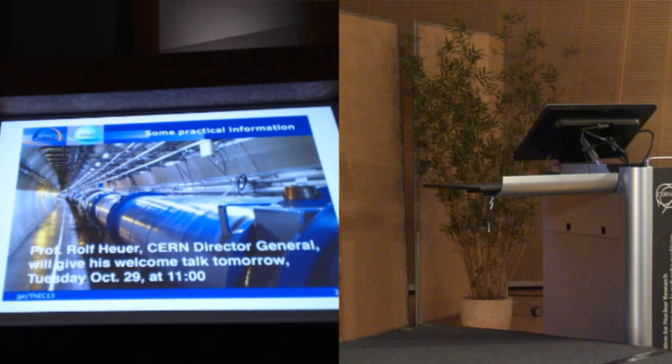The Director General of CERN had to unfortunately modify his agenda, so he will give his welcome talk tomorrow at 11 o'clock. Another announcement is that we have the honor of having the former president of the Swiss Confederation coming to attend the workshop tomorrow, and Pascal Couchepin will also give us a speech at the banquet tomorrow night at Hotel Président. I would like also to tell you there is a slight modification in the agenda compared to what you received in your brochure.

The lunch break was moved earlier by half an hour, so the last talk of the morning was moved to the first talk in the afternoon. Please take note of this. We have more than 200 participants from 32 countries. All continents are represented at ThEC13, and I think this is already in itself a good sign for this conference, and a clear testimony to a strong worldwide interest in thorium.

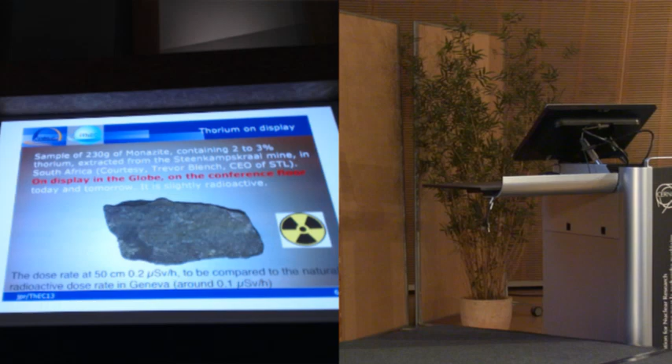Well, since we talk about thorium, I thought that it would be a good idea to have at least one piece of thorium in the room. And you will see it. There is a little display here. There is a little sample of thorium. Actually, it's thorium ore. It's monazite. It's coming from a mine in South Africa. It's 230 grams. There is 2 to 3% thorium in it.

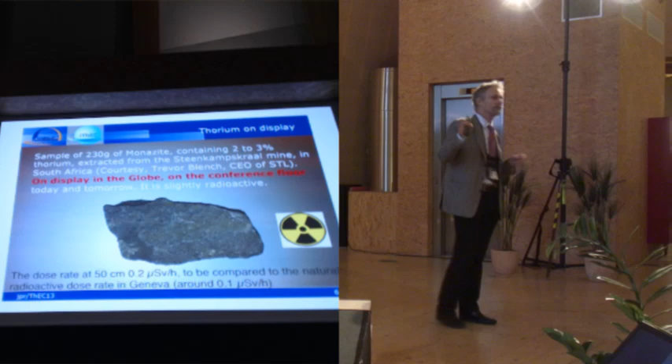And actually, this was the most challenging part in the organization of this conference, to convince all the authorities that you can have a little piece of radioactive things here in the room, even though the radioactive level is really benign. In Geneva, the natural radioactivity level is very low. It's 0.1 microsievert per hour, and this thing, if you sit at 50 centimeters, gives you 0.2 microsieverts per hour. So if one of you wants to spend the whole conference, night and days, 50 centimeters away from the sample, you will only increase your annual dose rate by 5 to 6%. And I'm sure you will not do that anyway.

So, a little practical detail. There will be 2 conference photos taken in order to make sure that we catch all participants. Both of them will take place in the globe, but the first one will take place right of this stand here, and we ask for your cooperation to do that relatively quickly so we don't spend too much time on this. The next photo will be taken tomorrow at 10:45 sharp. So if you want to be on the photo tomorrow with the former president of the Confederation, then be there.

This session has 2 talks. The first one by Claude, the second one Carlo Rubbia. Then we'll have the conference photo. There will be a coffee break. Coffee breaks take place in the tent, which is set outside the globe, and we resume with the next session at 11 o'clock sharp. So let me introduce the first speaker, Claude Haegi. He's a very busy man.

Among other activities, he's the president of the European Foundation for Sustainable Development of the Regions of Europe, the FEDRE. FEDRE is promoting sustainable development and inter-regional cooperation in Eastern, Central and Western Europe and around the southwestern Mediterranean Sea. He's an expert, honorary member and former president of the Congress of Local and Regional Authorities of the Council of Europe. He's a former president of the government of the Republic and Canton of Geneva, a former mayor of Geneva, and is president for Europe of the Foundation Denis de Rougemont.

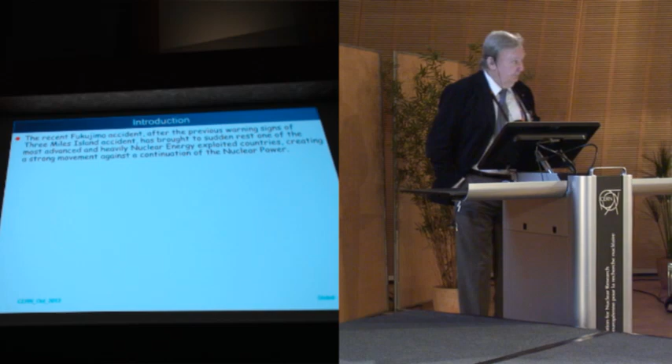Let me go back to the very nice presentation, very deep presentation of Haegi, which has described many of the points which I will try to come to mention. And let me start with this business of nuclear energy, and especially the recent Fukushima accident.

After the previous warning of Three Mile Island, we should not forget that the second event has brought to sudden arrest one of the most advanced and heavily nuclear energy exploiting countries, creating a strong movement against the continuation of nuclear power. This has proven the inadequacy of the present probabilistic concept, vastly used by the nuclear community, and the necessity of an entirely new, alternative, deterministic approach.

In order to be vigorous and continuous, nuclear power must be profoundly modified. New breeding reactions based on tritium, natural uranium or thorium, and which may last for many thousands of years, far beyond fossils, must be pursued, but with much stricter safety and deterministic level. The long-lived waste problem has to be solved. For such new processes, a distinction between renewable and non-renewable energy is purely academic.

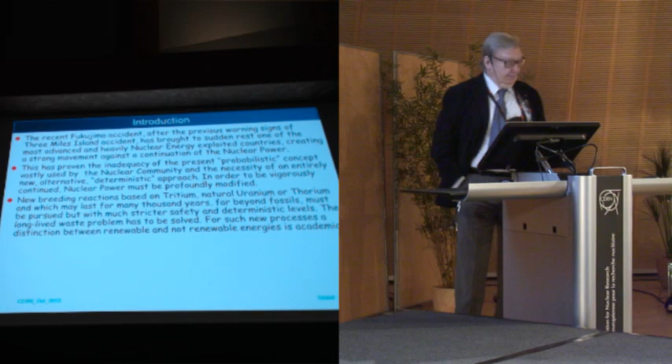Amongst the various breeding alternatives, the use of thorium represents a unique opportunity. This is a very old idea, strongly supported by the main fathers of nuclear energy, like Alvin Weinberg, Eugene Wigner, and Ed Teller, but perhaps then also ultimately neglected because of the intrinsic absence of military fallouts. The use of thorium deserves nowadays a considerable attention.

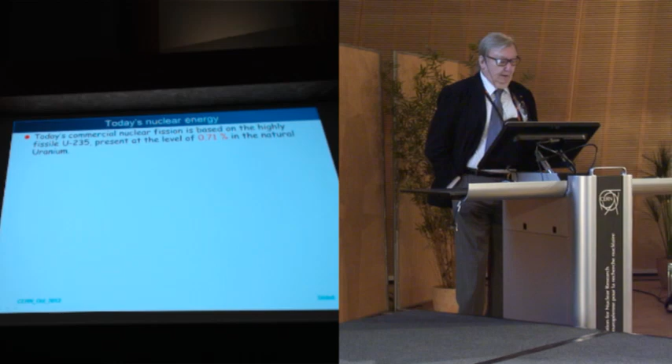Now, today's nuclear energy is based on the highly fissile uranium-235, which is well known to be present at 0.711% of the natural uranium. Ordinary nuclear reactors may operate either directly from natural uranium, CANDU type reactors, or more often with the help of uranium-235 enrichment, leaving behind depleted uranium tails, typically at 0.25%. In both alternatives, a substantial fraction of uranium-235 remains unused, and in practice less than 1 part in a few hundred of the natural uranium is actually burned.

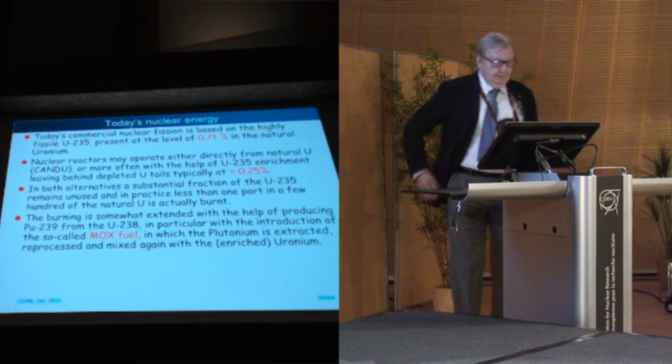The burning is somewhat extended with the help of producing plutonium-239 from the uranium-238, in particular with the introduction of the so-called MOX, in which the plutonium is extracted, reprocessed, and mixed again with the enriched uranium. These procedures reduce significantly, typically more than 30%, the consumption of uranium, but increase several times the amount of the minor actinides in the spent fuel, and the residual long-lived radiotoxicity of the waste.

Now, although the exact amount of exploitable ores is not exactly determined, and depends on the lowest level of the recoverable uranium, as long as uranium is used in this way, at the present level of consumption, which is 6.5% of primary energy, there are probably no more reserves of uranium than of oil and gas.

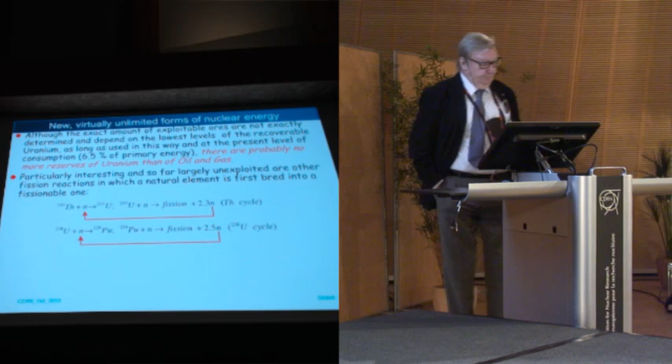Particularly interesting and so far largely unexploited are other fission reactions, in which a natural element is first bred into a fissionable one. And there are two of them that you well know. The first one is the thorium cycle, in which thorium becomes uranium-233, and then it fissions; it closes the loop. And the second possibility is uranium-238, in which it goes to plutonium-239, and then plutonium is fissioned back again with neutrons emitted.

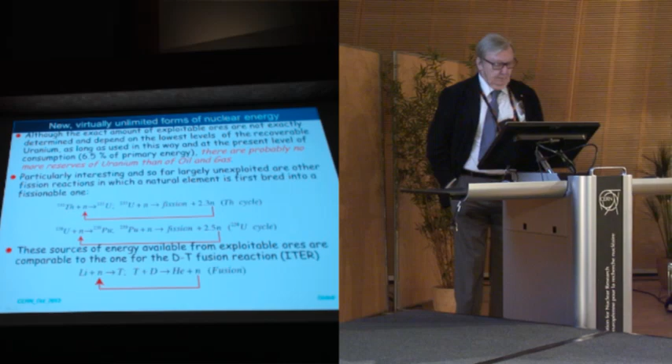These sources of energy available from exploitable ore are very large, comparable to the one of the fusion reactor, deuterium-tritium ITER, which is indicated here. Another breeding reaction: lithium plus neutron going to tritium, and then tritium becomes a source of fusion, tritium plus deuterium giving helium plus neutron.

The real question is, of course, how much thorium is available. Thorium-232, a pure isotope, an unexploited energy resource, is about 4 times more abundant than uranium in the Earth's crust. While most of uranium, however, is dissolved in the seas, thorium is present as mineral deposits. The total abundance is estimated to be 1.2 × 10^14 tons. Soil commonly contains an average of about 6 parts per million of thorium.

The monazite black sand deposits, which Jean-Pierre Haegi just described a minute ago, are composed of from 2 to 22% of thorium. Thorium can be extracted from granite rocks and phosphate rock deposits, rare earths, and tin ores, coal, and uranium mine tailings. Estimates of the available thorium resources vary widely. The 2007 NEA publication, Uranium: Resources, Production and Demand, gives only 4.4 × 10^6 tons of known and estimated thorium resources, but this still excludes data from much of the world.

For instance, with well-designed thorium burners, the whole 2007 electricity production of China, which is 3.2 trillion kilowatt hours, could be produced with simply 443 tons a year of thorium, via uranium-233, a few percent of the domestic Chinese rare earth production.

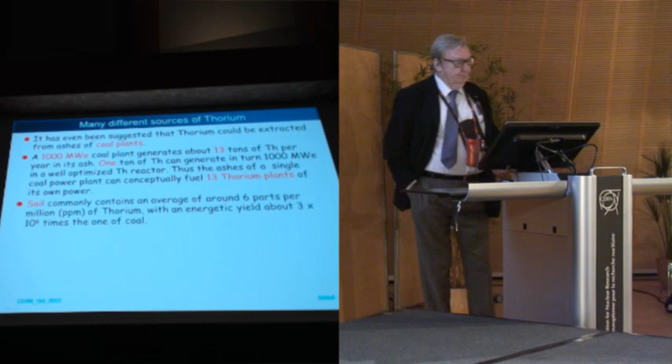Soil commonly contains an average of 6 parts per million of thorium, with an energetic amount of about 3 million times the one of coal. So, if burned in a reactor, the thorium in soil will generate 6 × 10⁻⁶ times 3 times 6, 18 times the energy of the same amount of coal, as I indicated before.

Therefore, recovering 1 in 1,000 of all the thorium in the crust, which, as I said, is 1.2 × 10¹⁴ tons, is equivalent to producing the total primary world power, which today is 15 terawatts, with simply 6 kilotons per year of thorium during about 20,000 years.

I think in order to show very clearly the difference between oil, natural gas, coal, and uranium, you can look at this diagram here, which gives the global energy resources in zettajoules for oil, conventional and unconventional, total oil. You can see the indicator there. Yearly consumption is indicated there. Resources are indicated there. And then consumption until now, already used up, are these things.

You can see clearly that there is more oil now sitting underground than has already been used. So in fact, it means that there's plenty of oil for many, many years to come. Natural gas likewise. Coal is there. Now the important question is the total fossils, indicated down here. You can see this 281 zettajoules available. But this has to be compared with uranium.

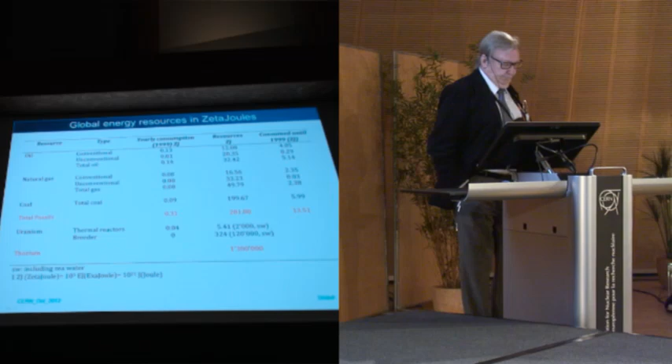with 120,000 of sea water. But this has all to be compared with the situation of thorium, which is all there in the rock, and it represents something like 1.3 million zettajoules. So you can see from those numbers the absolute preeminence of thorium as a source of energy for the future of mankind.

Okay, conclusions. There's only one conclusion. The reservoir represents an attractive potential energy supply for many millennia to come with little or no CO2 emissions. For instance, as I said at the beginning, the total electricity of China could be produced for 20,000 years with thorium reactors and the million tons of thorium available.

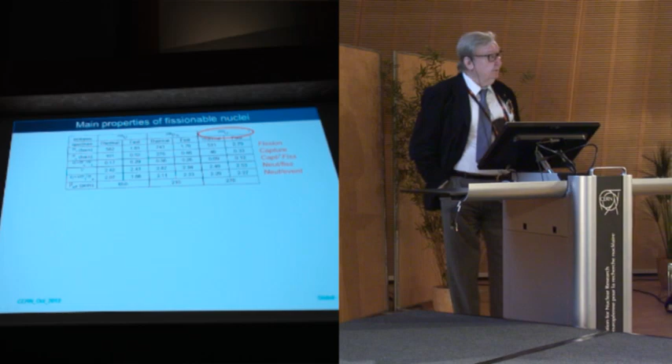Now let me compare the various fissionable nuclei and get a very simple comparison between uranium-235, plutonium-239, and uranium-233. You can see in this table, first of all, the fission, then the capture value, third the ratio of capture to fission, and finally the most important number is nu, the number of neutrons per fission, and then you can calculate also the number of neutrons per event, including not only fission but also capture.

And you can see the preeminence in this equation of uranium-233 over the other elements, and the other important factors which favor uranium-233 over the other systems. Uranium-233 is rather insensitive to neutron energy, alpha and eta. Uranium-233 is the best fissile isotope in the thermal range. You can see here 9% or 12% for the ratio of capture to fission, and this is a very important number.

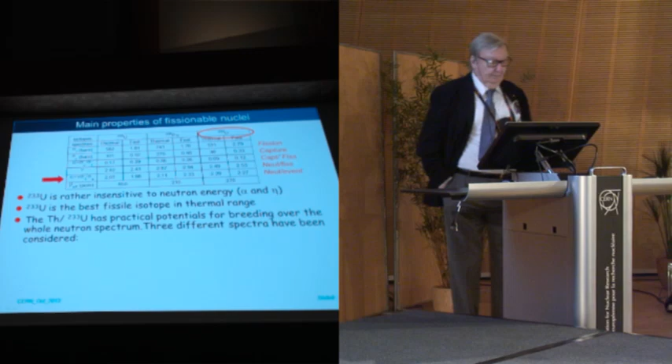Thorium-uranium-233 has practical potential for breeding over the whole neutron spectrum. As you can see in the last column, you can have thermal and fast. Three different spectra have been considered, and will be discussed in my presentation. Thermal or epithermal neutrons between 0.1

and 1 electron volts. Over the resonance region, in which neutron energy goes between 10³ and 10⁴ electron volts, and then fast, which goes from 10⁵ to 10⁶ electron volts. Instead, as you will see in a minute, the uranium-238 plutonium breeder is operable only with fast neutrons.

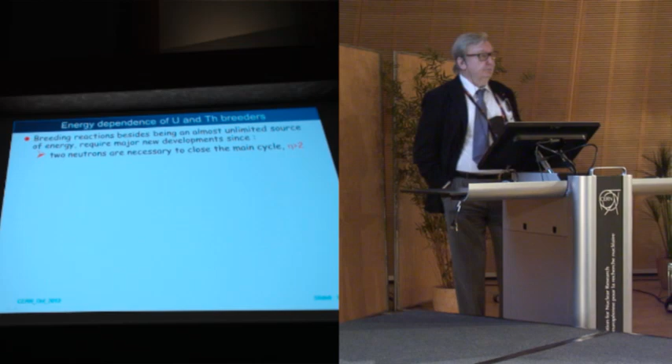And then let's be more specific. This breeding reaction, besides being an almost unlimited source of energy, requires, however, a major new development. Since two neutrons are necessary to close the cycle, one to make the material to be bred, and the second one to transform the bred material into neutrons, eta therefore has to be larger than 2.

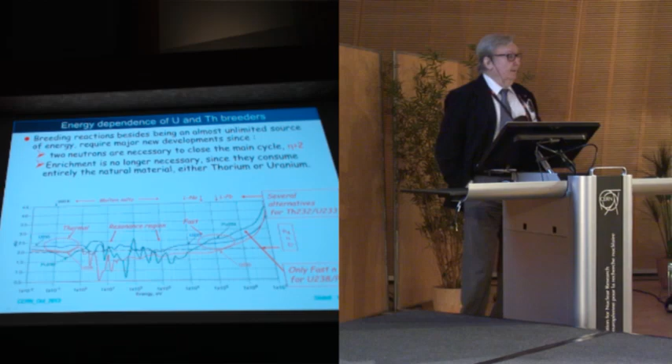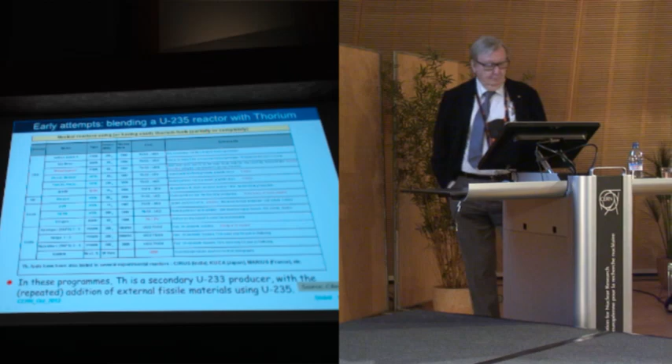Now, let me go a little bit into the historical development of thorium. The early attempts go back to the golden days of the 60s, in which the idea was to blend a uranium-235 reactor system with some thorium. You can see a large number of possibilities described here, small and large, and there has been quite a development from this point of view. In these programs, thorium is a secondary uranium-233 producer with repeated addition of external fissile uranium-235. So it's a mixed thorium-uranium system. When uranium is over, thorium will no longer be usable.

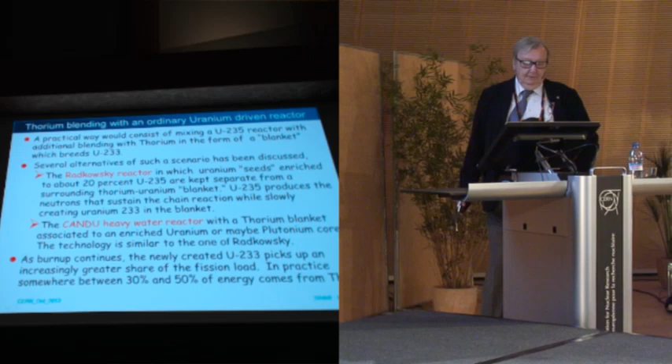The second possibility is the attempt with CANDU heavy water reactors with a thorium blanket associated with an enriched uranium and maybe plutonium core. This technology is similar to the one that Radkowsky had developed. As burnup continues, newly created uranium-233 takes up an increasingly greater share of the fission load. In practice, between 30% and 50% of the energy comes from thorium, and the rest comes from uranium itself.

Now, of course, the real hope is to make a pure thorium breeder, a breeder in which only thorium participates from A to Z. This is essentially the known idea. There are two important people who contributed to this. One is Alvin Weinberg, and the second is Edward Teller. Now, basically, the thermal breeder is represented in this picture here, a simplified diagram from a Fuji reactor.

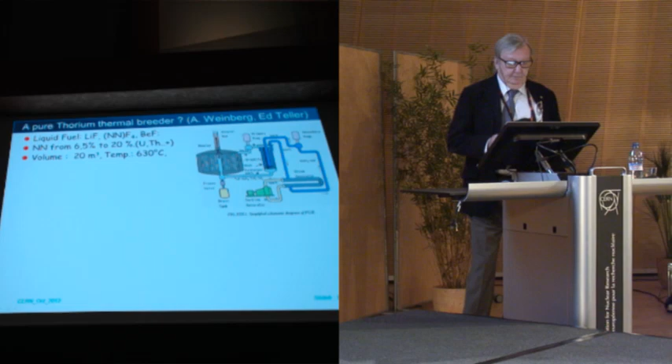It is a combination of a liquid fuel, which is made out of lithium, beryllium, and a fluoride of heavy metal, where N is either thorium or uranium, and which contains somewhere between 6.5% to 20% of thorium or uranium. The volume of this reactor is substantial: 20 cubic meters. The temperature of this Flibe is 630 degrees Celsius. The power of this identified reactor is 1 gigawatt electric.

And the problem with this is that the molten salt reactor fuel is continually reprocessed by an adjacent chemical plant online. This is absolutely necessary to make the thing work. The salt has to be reprocessed every 10 days to ensure criticality. Now, there's a very complicated process here which I'll very quickly describe. The fluorine removes uranium-233 from the salt. A molten bismuth column separates protactinium from salt before decay. And fluorine distills the salts, and the thorium salts must be separated from the fission fragments, which are the waste.

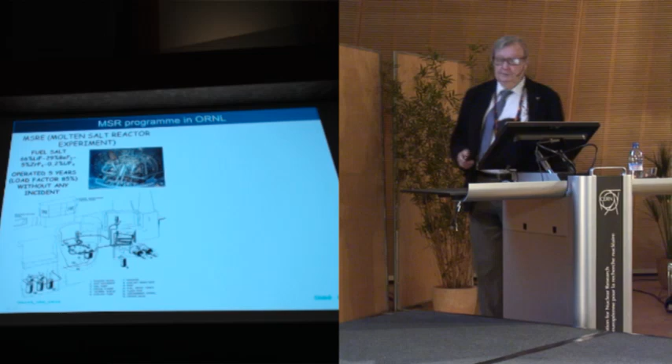Now let me show you this story. Of course, this story was discussed many years ago in the MSRE, the molten salt reactor experiment. It's a well-known milestone of a pure thorium reactor. This thing was developed in the early 60s, and it was operated for 5 years without incident. Everybody knows, I suppose, about that. There is a combination, as you can see, of a nuclear reactor and a chemical plant.

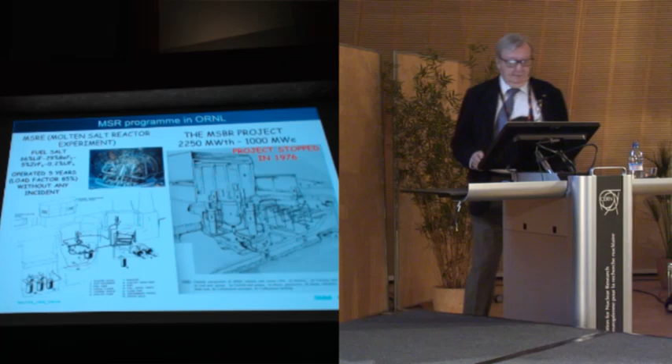Now, there was also a project called the MSBR project, which was presented to make a real big scale reactor, 2 gigawatts with 1,000 megawatt electric. Such a design, you can see here, was being put together, but was stopped, as I said, in 1976 in exchange, of course, for the other alternatives.

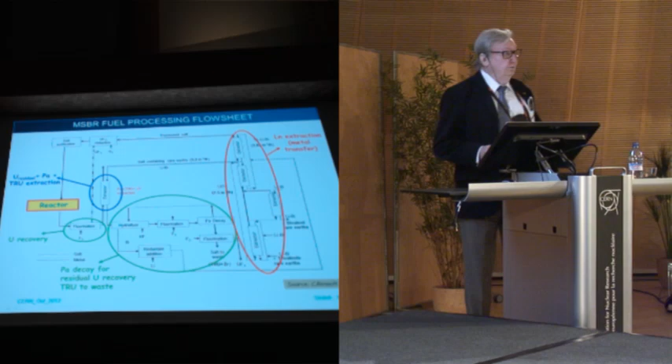The second story is coming from Teller. The thorium fuel reactor is described here and is using molten salt technology. There are lots of features in this reactor which are worth mentioning. The first feature is that it is underground. You see, this is rock, so the system is down there. This is the unit, and the heat is produced here and comes up to the surface. This is a molten salt device in which, in fact, the fuel, the uranium and thorium, are mixed together. Here, for some reason, there is no use of a cooling station.

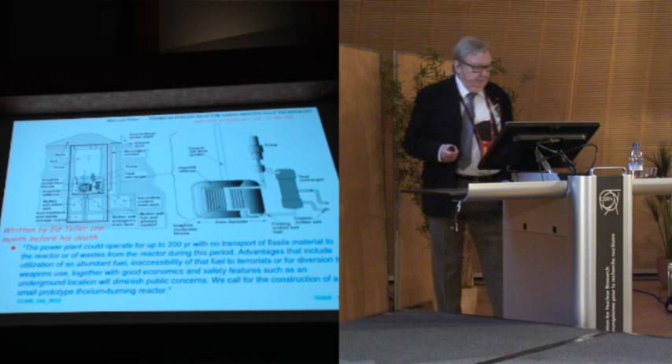This paper was written by Teller 1 month before his death, in 2005, and he wrote something which is worth mentioning: the power plant could operate for up to 200 years with no transport of fissile material to the reactor or waste from the reactor during this period. Advantages that include utilization of an abundant fuel, inaccessibility of that fuel to terrorists or for diversion to weapon use, together with good economics and safety features such as an underground location, will diminish public concern. We call for the construction of a small prototype of a thorium burning reactor. This was done in 2005.

Let me remind you that our work was already done well before, because we had done the work of the CERN activity in the late 90s. But Teller continued to repeat and sustain these kinds of ideas. I think this is important. This was done, as I said, only 1 month before he died. Not only is the assumption really true, but actually the idea is tantalizing.

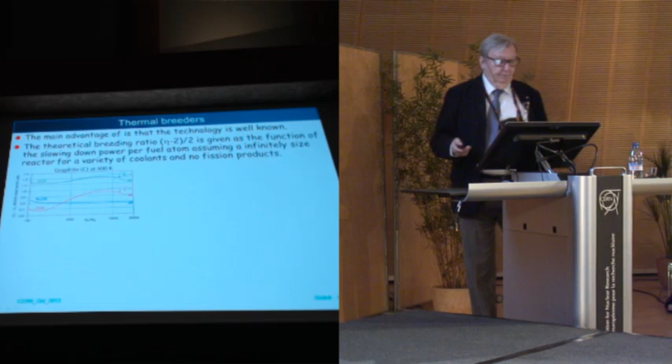So let me come back to the conclusion about thermal breeders. The main advantage of the thermal breeder is that the technology is well known. You can see here, for instance, the behavior for graphite of uranium-233, which is larger than 2. And this is the only thing possible, because the other processes, plutonium and uranium-235, do not reach the breeding equilibrium. The theoretical breeding ratio is given here for an ideal infinite-sized reactor, a variety of coolants and no fission products. You can see more detail of what happens if you do the plot for water, heavy water and carbon.

You can see here that with the appropriate ratio between the coolant and the fuel, you can get something like a breeding ratio of the order of 1.2 in the optimal condition for any of the three solutions. So it's possible to construct either a D2O, H2O, or carbon system in this region with a number there.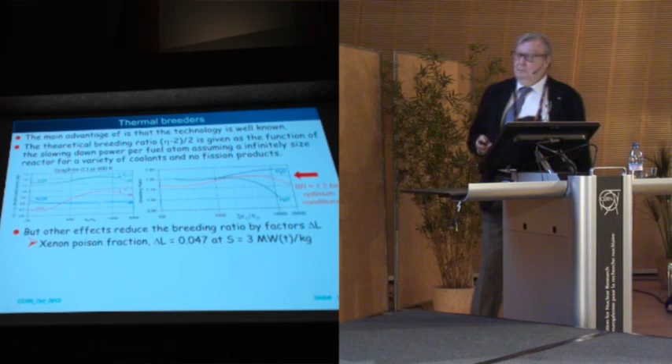However, many other effects reduce the breeding ratio, and delta L is a relative change of the breeding ratio. For instance, we have to add the xenon poison fraction in thermal reactors, which for a relatively low density, like used by Weinberg, of 3 megawatts per kilogram, gives a reduction in L of 4.7%.

Then you have losses to the intermediate Pa-233 capture, where protactinium suppresses uranium-233 because it kills it, giving another change of about 0.1 in L. The third effect is fission product buildup, and also the fact that when you continue to run the system, besides uranium-233 you produce uranium-234, which is relatively less fissile. So the theoretical breeding ratio of 1.2 essentially disappears because of these factors: xenon poisoning and, most importantly, protactinium-233 captures, and so forth.

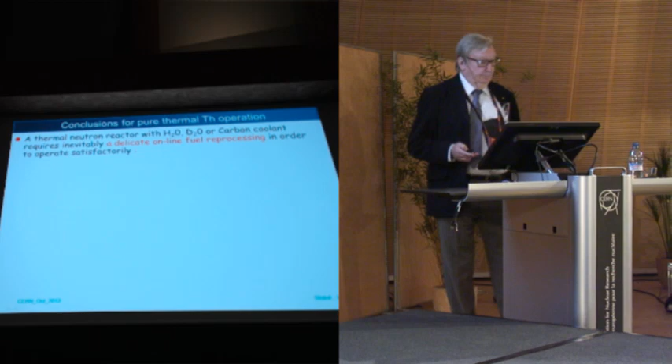And therefore, this is why you necessarily need reprocessing. In fact, the conclusion for a pure thermal thorium operation is that thermal reactors with hydrogen, deuterium, or carbon coolant inevitably require delicate online fuel reprocessing in order to run satisfactorily.

There are two possibilities for this. In a critical reactor, without such chemistry, the small k excess greater than 1 will be quickly wiped out by the presence of fission products, fuel cladding, and so on, as I said. In comparison, an ordinary CANDU, which has the lowest k-infinite possible, has k0 of 1.47, while here we have something like 1.1 to 1.2 for the case of thorium, so it's too small.

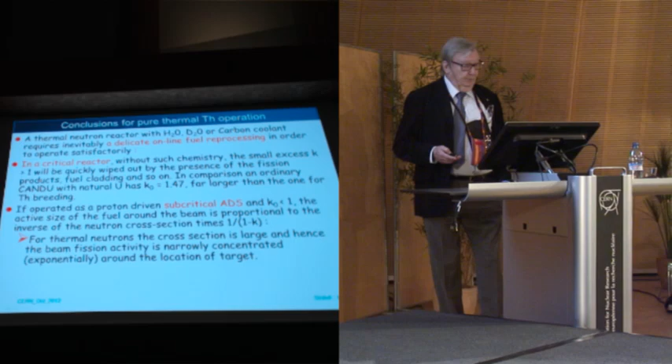Now, you can say, why not make a subcritical ADS, thermal subcritical ADS, with a proton-driven system, K less than 1? But then you get another problem, because the active size of the fuel around the beam is proportional to the inverse neutron cross-section times 1 over 1 minus K. For thermal neutrons the cross-section is large, so the fission activity is narrowly concentrated, exponentially, around the target. Therefore the beam-activated volume for fission energy production, even in a thermal ADS with a reasonable K0, is strongly localized and not very uniform.

So it's not easy to make even a subcritical system as a thermal unit, just because the concentration is very close to the proton beam, and it does not allow you to construct a uniform filling of a critical mass. Now, the conclusions.

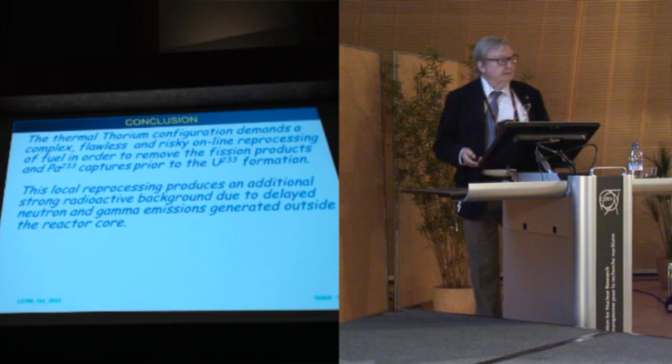The local reprocessing produces an additional strong radioactive background from delayed neutron and gamma emissions generated outside the reactor core. That's another phenomenon: the system which extracts material for reprocessing is also carrying some neutrons with it, because of delayed neutrons and gamma emissions. Therefore, not only will the reactor be very radioactive, but all your chemical plant will be super radioactive. You have to solve that problem.

It's unlikely such a technology may become widely acceptable, especially in view of the presently very sensitive critical public concerns. So thermal thorium reactors have a lot of problems, which seem quite serious.

This is why another point of view was created, in fact CERN-related, already in 1995, which is called the thorium-driven fast energy amplifier. Let me briefly describe this situation.

The drawing is there, many of you already know it. It's a subcritical system powered by a proton accelerator, using fast neutrons in a fuel cycle based on natural thorium. This is a closed cycle, with recycling indefinitely happening; the waste are fission fragments and structural material, which are relatively short-lived. Lead is used as a target, both as a neutron moderator and as a heat carrier.

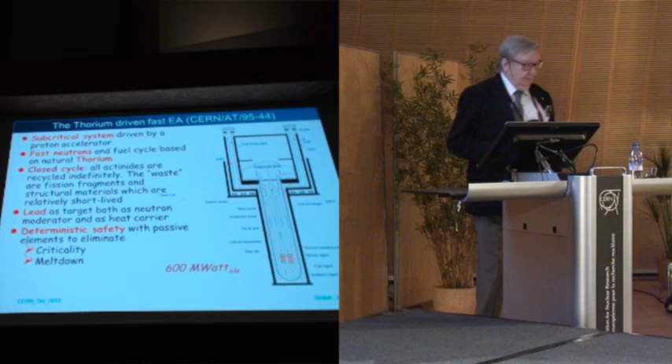This is a subcritical system with deterministic safety and passive elements to eliminate criticality. There is no meltdown possibility, with decay heat and seismic protection built in. This is essentially the key to this process.

The fuel discharge produces some spent fuel. The spent fuel is reprocessed and refabricated, adding the fresh thorium supply, and it is coming back into the cycle, except that the fission fragments are packaged as waste and put in the central deposit. That's the basic idea behind all this.

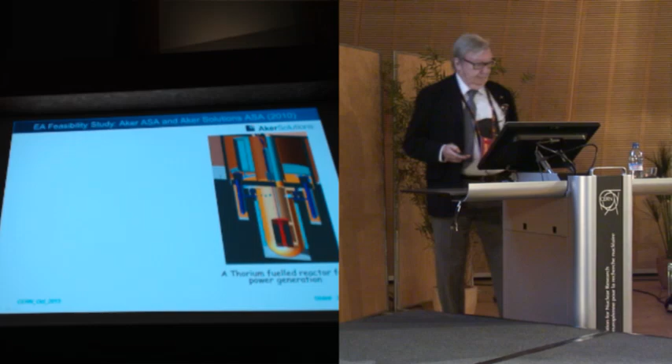Now, here I have all the parameters, which I will not have time to describe in detail. This idea was developed very recently, in 2010, by a feasibility study by Aker Solutions company in Norway. This is what has been developed, very similar to the original descriptions. The power is the same, and you can see the characteristics here, and how it's constructed. This is a very nice design, which is perfectly feasible in my view, and it's very nicely and well designed. So we have a feasibility study already available on that.

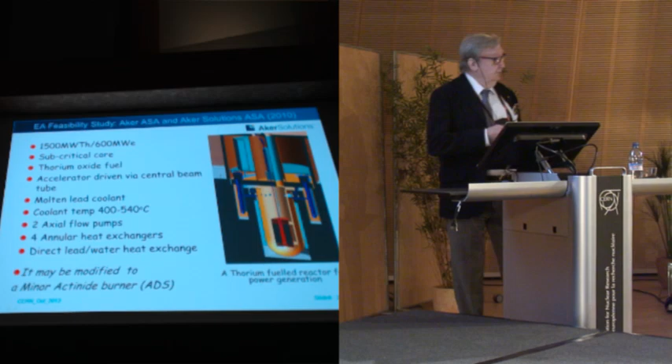And of course, the same system can also be modified as a minor actinide burner for ADS, which no doubt will be discussed by other people during the conversation.

Now let me stress the alternatives here. Supposing you want to continue to generate 1 gigawatt electric power for 1 year, then you need 3.5 million tons of coal, and that represents a significant impact on the environment, especially for CO2 emissions. Now if you go to the ordinary power reactor, you need 200 tons of uranium, low CO2 impact, but challenges to the processing, long-term storage, hazardous waste, proliferation, and enrichment.

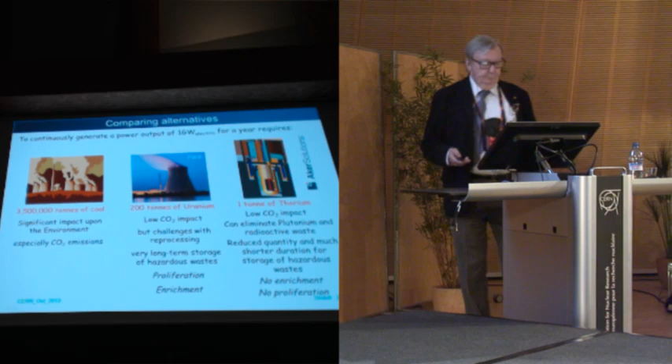Now the solution of the fast thorium-driven energy amplifier, as described by the Aker Solutions here, is 1 ton of thorium, low CO2 impact, eliminates plutonium radioactive waste, reduces the quantity and duration of storage, hazardous waste—there's no enrichment, no proliferation. So the advantage of this thing is really nice.

Now let me show you some of the characteristics of this number. Let me look at the numbers for a practical situation. So let's take 1 GeV and 1.5 GW thermal power. You can see here, we start from proton energy.

We need 2.7 × 10^20 fissions per second if we do a K equal 0.997 with a gain of 700, as we did in the last developments together with Aker Solutions. There are 3.8 × 10^17 spallation neutrons, 30 neutrons per every proton. There are 1.3 × 10^16 protons per second, which are accelerated.

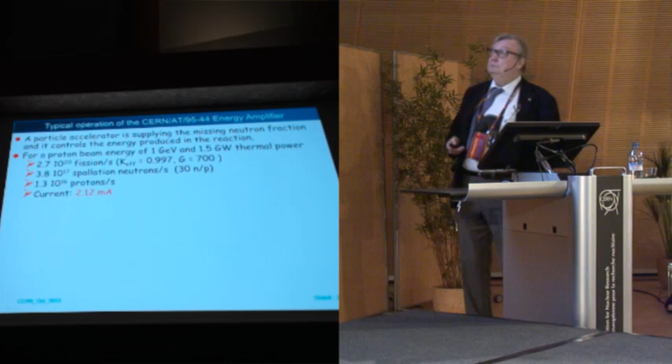So to make this power of 600 megawatts electric, 1.5 gigawatt thermal, you need a current of only 2.12 milliamps per 1 GeV, which corresponds to 2.2 megawatts, perfectly feasible within the state of the art, and will probably be discussed by some people here during the next days. So the accelerator is perfectly feasible, and so forth.

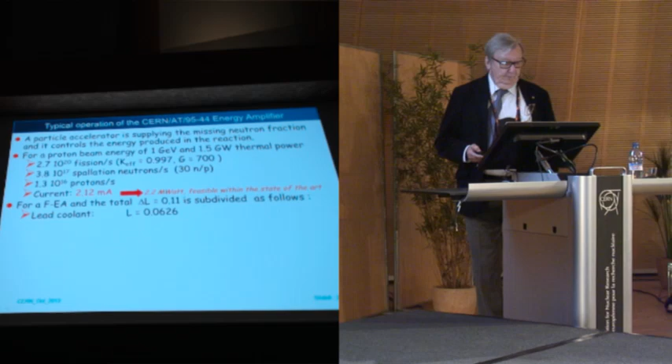Now the loss in the number of captured neutrons, the reduction in efficiency indicated here, is substantially as follows: coolant lead 6%, cladding 3%, beam window a little bit, then main vessel effects, then leakage and so forth. So the conclusion is that due to fission products leading to growing burnup, the final delta L will be 0.26, including also buckling changes due to the reduction of fuel mass.

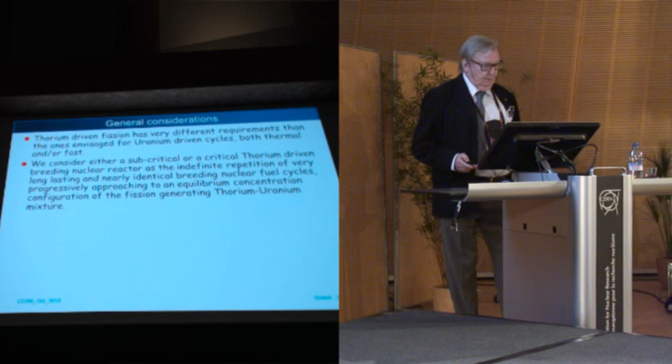Now let me also mention the comparison between the basic ideas of this project, which is based on the energy amplifier. The subcritical or critical thorium breeding nuclear reactor is essentially considered to be an indefinite repetition of very long-lasting, nearly identical breeding nuclear fuel cycles, progressively approaching an equilibrium concentration and configuration generating a thorium-uranium mixture. Such a specific configuration, which I discuss very briefly, is called a secular configuration.

It's characterized by extreme fuel stability during a very long duration of the cycle, in particular an extremely constant spontaneous neutron multiplication coefficient, as you'll see in a minute. Each cycle lasts 10 to 15 years, determined by the integrity of fuel materials and radiation damage, DPA, displacement per atoms. Now let me show you the basic features here.

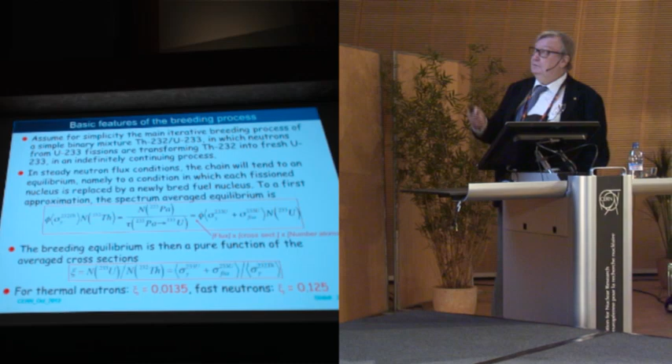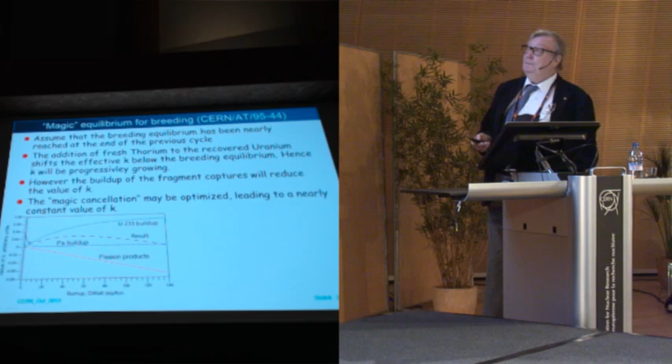But on the other hand, we have fission products which will reduce the multiplication coefficient with distance, and you can see that the two things cancel. So in a proper condition, the buildup of uranium-233 is exactly compensated by the fission product emergence, and the result is something extremely constant, staying constant to about 1% over 10 to 15 years.

Here you find a graphic image of that situation. You can see that the delta here is 1% change in K, and it goes all the way from here to there, from 0 to something like 120 gigawatt a ton, which is something like 8 to 10 years of running time, because of this cancellation coming from the magic equilibrium used in our case.

Now let me show you that in a more detailed way. You can see here a graph which shows the process of constructing and using an energy amplifier as a function of time. At the beginning, we need to start with initial fuel, which is standard MOX, made of 85% thorium oxide and 15.5% plutonium oxide.

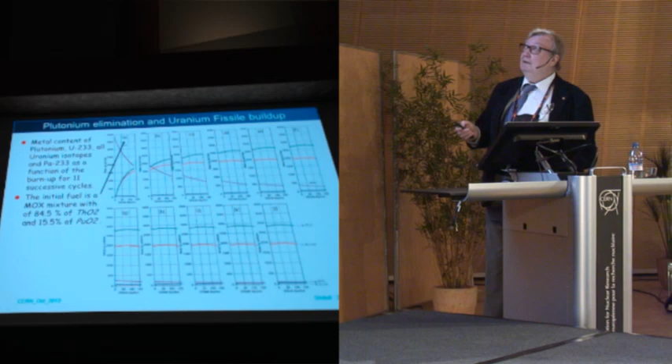You can see in that graph the beginning, the situation of the plutonium coming down and the buildup of uranium-233 coming up. The combination of the two occurs as a function of time. The more time goes by, the more you see the initial MOX disappearing, getting very small after some time, while you have a constant buildup of the uranium isotope.

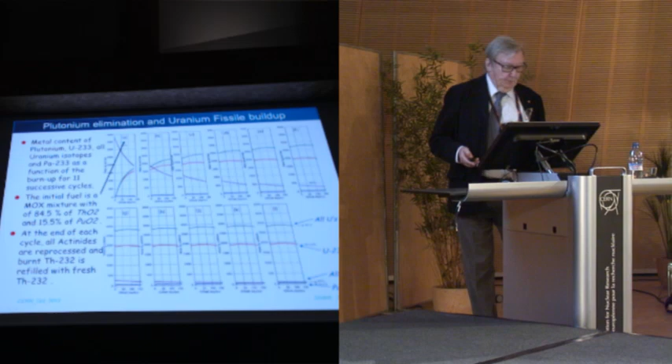As indicated there, you can see here... sorry, what's going on here, I lost it. You can see here that all the uraniums are there, uranium-233 is there, all the plutoniums are there, and this is the protactinium-233 production. Therefore there is a smooth transition all the time from the initial MOX mixture to the construction of an indefinite production based on thorium.

The important question here, of course, is the question of K. You can see here in the same diagram the effect of the number for the K effective excess, which is something like initially 4%, and you see that nowhere along the line do you go below a few percent of excess in criticality, which is used in order to operate the system and keep it essentially subcritical.

You can see this transition between the situation in which you start with MOX and plutonium down to the situation where you have pure thorium is absolutely smooth. You can see how constant the K is over the 150 gigawatt-day-per-ton burnup, which corresponds to many years of functioning. Therefore, the transition from plutonium to an asymptotic thorium-uranium mixture is absolutely constant and very credible.

This is actually calculated with precision with the evolution of this energy amplifier, which I described in the beginning. So the upper K equal 1 is then adjusted with the help of control bars, to be able to reduce the rate and make it slightly subcritical, as we said.

Now, the overall situation of course has many aspects. As I said, the basic solution of this energy amplifier is an uninterrupted operation of about 10 years, in which the only waste is fission fragments. The radioactivity of the material is intense but limited in time.

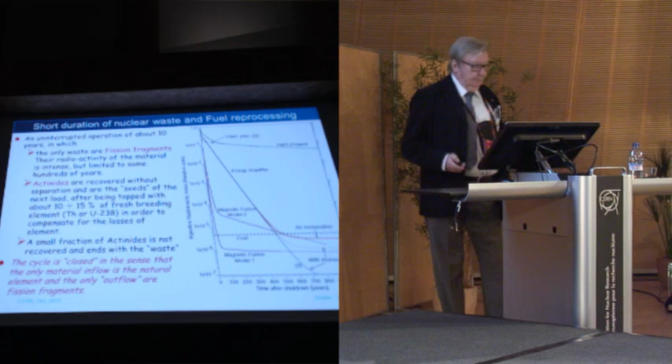Actinides are recovered with no separation. The seeds, after topping with about 10 to 15% of fresh breeding element, thorium, in order to compensate for loss of the element. A small fraction of actinide is not recovered, ends up in the waste, and is taken into account. And the cycle is closed, in the sense that the only material inflow is a natural element, and the only outflow is the fission fragments.

So conclusions: a pure thorium breeder may operate in a variety of configurations, according to various numbers. However, the basic chain reaction will converge to a breeding equilibrium, namely to a steady condition, in which each fission nucleus is replaced by a newly bred 233 nucleus, and simply the operation consists in adding periodically thorium supply, and ideally the process is closed. In other words, you put in thorium and you get out fission fragments which decay with a relatively short lifetime, and nothing happens after a while.

Now, few questions. I have another 10 minutes to finish this thing. 10 minutes, it's fine.

Proliferation issues, I think it is an important thing. There are three main elements in the proliferation issues which have to be worried about: uranium, neptunium, and plutonium-238. Now you can see here the diagram shows the situation. You can see the bomb-grade plutonium-239, the uranium, neptunium, and plutonium-238. Here is indicated the critical mass in kilograms, and the decay heat of the critical mass in watts.

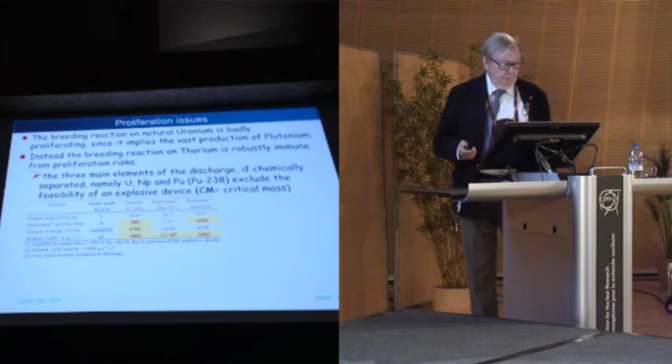You can see that, for instance, plutonium will give a very hot material. Uranium-233 will be medium, while compared with bomb-grade plutonium the gamma activity will be huge in the case of uranium thorium. In fact, this is 1,300. These are curies per critical mass. And the neutron yield also is very important, which for instance kills the neptunium, because there are too many neutrons. You get a fission factor which makes the situation unacceptable.

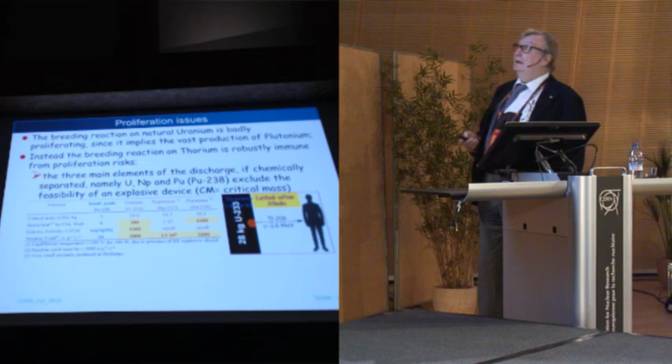Now you can see here what will happen if you were to use uranium-233, and the critical mass of uranium-233, which is 28 kilograms, asymptotically contains thallium-208, which emits very strong gamma rays of 2.6 MeV, and at a reasonable working distance you will be reaching the lethal dose after 10 minutes. That's clearly something which you will not be able to use under normal conditions.

Now, the long duration of the fuel cycle permits to keep it sealed under international control, of course avoiding research for any other possible bomb-like materials, but the point is that the proliferation resistance seems to be quite strong, and anti-proliferation measures are strong, combined with the fact that the fuel cycle is closed, possibly under control. It may be possible to do this thing in a very safe way.

Now, in the construction of the system, three possible materials were described here: lead, bismuth, and sodium. And let me show you here a graph which shows the situation. You can see here the three possible alternatives: lead-bismuth eutectic, pure lead, and sodium. You can see the ingested radioactivity for the energy amplifier as a function of time, and I put the time going up to 10 years.

You see that initially the situation of sodium is slightly worse than lead, but then with time sodium and lead have roughly similar ingestive radiotoxicity, as you can see there. Down below, you see subdivision by isotopes. But you can see, on the other hand, that the situation of the lead-bismuth, because of the presence essentially of polonium, is absolutely disastrous.

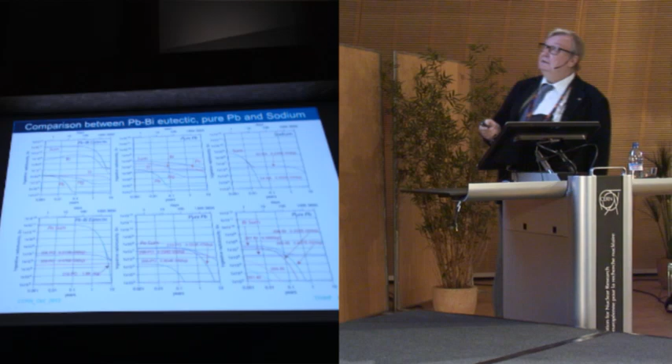You can see the situation here. You can see that we are here with the emissions about 10 to the 11 sieverts, going on for a long time, up to a year. While here, the sum is about 10 to the 8 sieverts going on in this particular way. And here it's about 10 to the 6 sieverts, and it goes down. Sodium is slightly smaller.

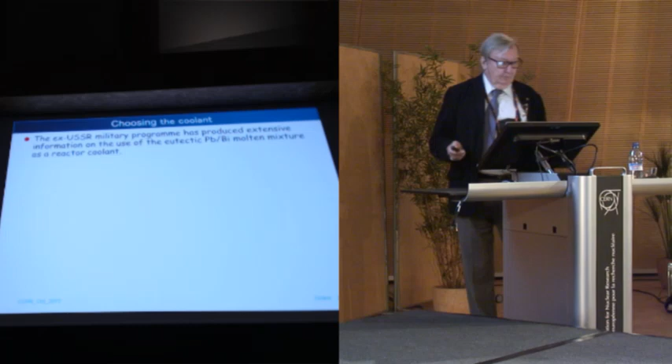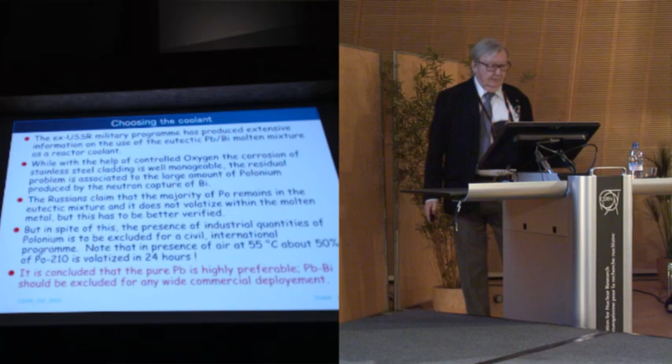So essentially, we have a lot of experience from Russian activity with lead bismuth in the molten mixture, but the fact indicated down here is that the polonium is extremely important. By the way, notice that in the presence of air, 50% of the polonium-210 is volatile in 24 hours. Although there are some hopes that it may work, it has to be proven. So it is concluded that pure lead is highly preferable. Lead bismuth should be excluded for any wide commercial deployment. So I think you should really go to lead.

So in conclusion, a fast metal-cooled ADS may represent a practical solution to the exploitation of the pure thorium breeder. Detailed design based on CERN AT-95-44 has been completed by Aker Solutions, which has done a proper job of designing the technology on the basis of our physics. The metal coolant can a priori be sodium, LBE, or lead.

However, problems persist, since sodium is highly flammable. LBE is plagued by a very large amount of polonium activity. Lead is far less radioactive, but it needs higher temperatures and may be plagued by corrosion. So although the problems are much less than in thermal reactors, there are still some problems there.

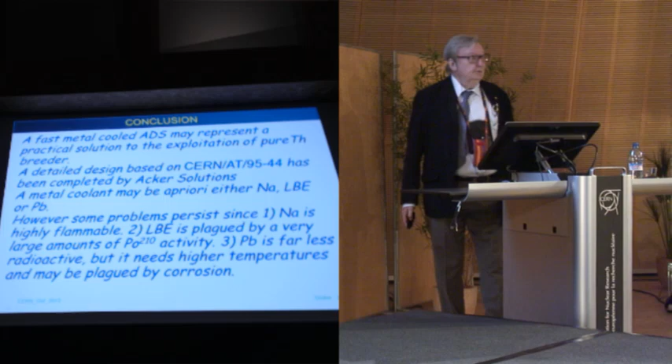Now, let me also mention other fundamental questions. I will use some more minutes of my presentation, whatever is required. If you want to stop me, stop me. So for now, it will be a little more than 5 minutes. I'm sorry.

Now, working on neutron resonance: neutrons for fluoride salt and graphite are thermal. And essentially, other possibilities go to a situation in which you are in the resonance region. This is obtained in a very simple way. Let me show you how you do it in practice. This has been done by lots of people. It's a very nice idea, and it removes reprocessing.

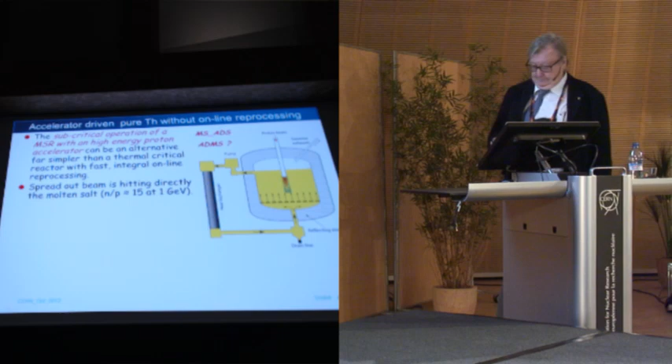This is molten salt, which contains simultaneously the uranium and thorium, and also the other fluorides. And this system is circulating with the heat exchanger and a pump in a very simple way. The neutrons are less intense, only 15 per proton, but still significant. And the operating temperature of the system is, of course, much higher.

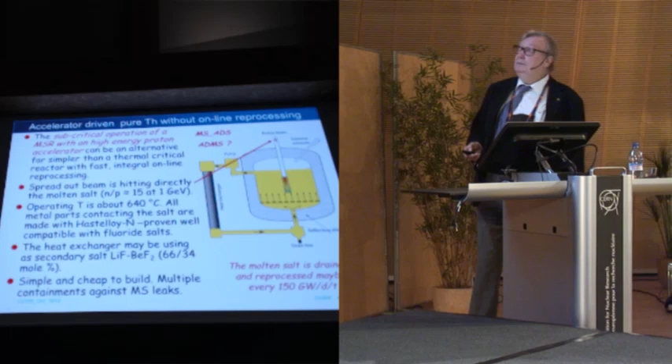And there is a lot of information which is still there. It tells us that Hastelloy has proven compatible with fluoride salts. The heat exchanger is standard, and essentially it's simple and cheap to build with multiple containments against leaks. So this possibility is a very interesting one which is worth looking at as an alternative. Now, the molten salt is drained and reprocessed maybe every 150 gigawatt-days per ton. So this is still a molten salt system which doesn't need any online chemistry reprocessing because of the high energy.

Now let me also very briefly mention that, well, let me skip this one because you have other things. So I would like to spend my last 5 minutes on a new reprocessing method, because I think this is a very important question. Reprocessing.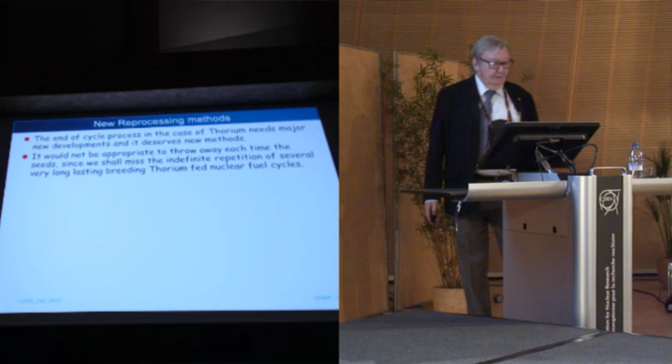Reprocessing is the key element behind this energy amplifier, but new reprocessing methods are necessary. The end-of-cycle process, in the case of thorium, needs major development and deserves new methods. It would not be appropriate to throw away the seeds every time, as we shall miss the definite advantage of very long-lasting thorium fuel cycles.

But the standard aqueous processes, Thorex, Purex, and so on, applied to thorium fuel, in which actinides are separated and further recovered in a centralized reprocessing facility, are presumably possible, but certainly both very complicated and costly.

So I don't think Thorex and Purex is the right solution to go with an energy amplifier in this particular case. Aqueous solution uses an organic solvent, which is easily decomposed and deteriorated in the case of closed thorium-uranium cycle by the substantial effects coming from the large radiation damage. So we have a problem there.

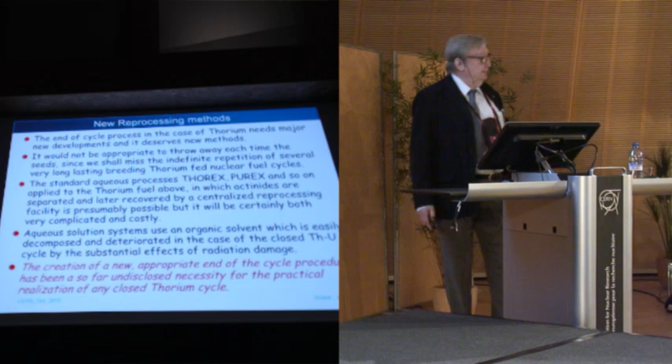And the creation of a new appropriate end cycle procedure has been so far an undisclosed necessity for the practical realization of any closed thorium cycle. And I'd like to spend my last minute to tell you essentially how, according to me, you should be reprocessing. Now, there is one very important property. The uranium and plutonium are the main seeds in the case of the fast energy thorium amplifier. And the other interesting property is that the volatility of fluorides for plutonium and uranium is very strong.

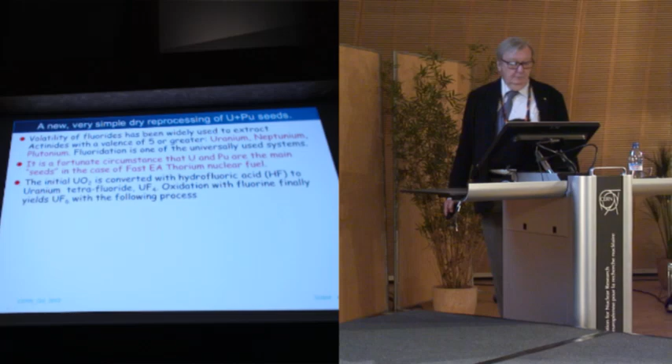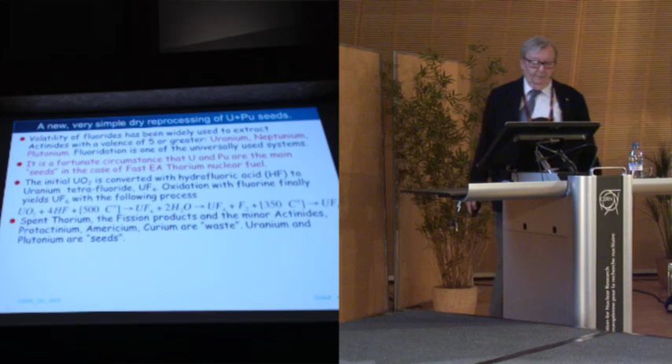So initial UO2 is converted with hydrofluoric acid to uranium tetrafluoride, and then from tetrafluoride you go to hexafluoride. You can see the diagram in there. And the result of that, you go from the spent uranium seed out of oxide into fluoride with such a simple process. Now, then spent thorium, fission products, and minor actinides, protactinium, americium, etc., are considered waste. So I just concentrate exclusively on plutonium and uranium seeds, and then new thorium is also used in every cycle because thorium is cheap. And the final transformation from fluoride to oxide is currently performed with the help of hydrogen.

Let me show you here in this diagram what you do. You see the picture here. You come with a spent fuel in there. You wait for 6 months for the protactinium to decay. Then you make a decladding. You go through a fluorination, and the fluorination is producing here plutonium hexafluoride and uranium hexafluoride, which goes down here, and all the other stuff comes down as waste. So you only get out the plutonium and uranium with a simple fluorination process.

Then you condense, you volatilize it. Then eventually you go through a second process, which I'll discuss in a moment. But anyway, you go to hydrolysis, and then you put in fresh thorium oxide, and you make new fuel. So you start with spent fuel here. You separate out the plutonium and uranium as the seeds, all the rest is waste, and then you go down to this process. You go from uranium to UF6, you go with water and hydrogen into oxide again. You top it with fresh thorium oxide, and you go to new fuel.

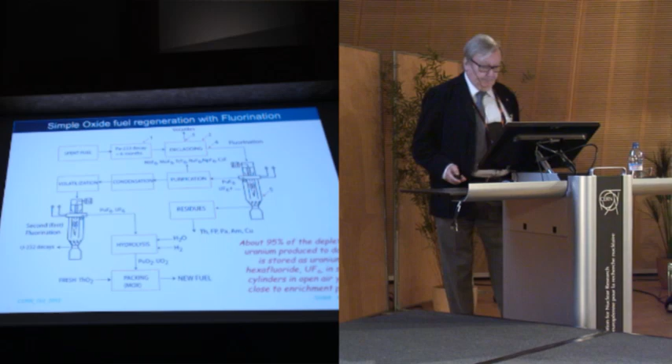So this is an extremely simple regeneration process with fluorination, which in my view could be done very easily on the spot. About 95% of the depleted uranium produced today is stored as uranium hexafluoride in steel cylinders in open air yards close to the enrichment plant, so this process should be perfectly possible.

This you do essentially with the long-lived protactinium, which can be recovered with the help of bismuth. Bismuth can be used in order to take the protactinium out, and this takes away the protactinium 231.

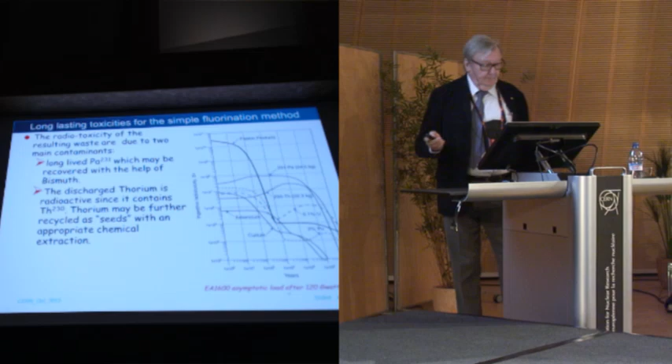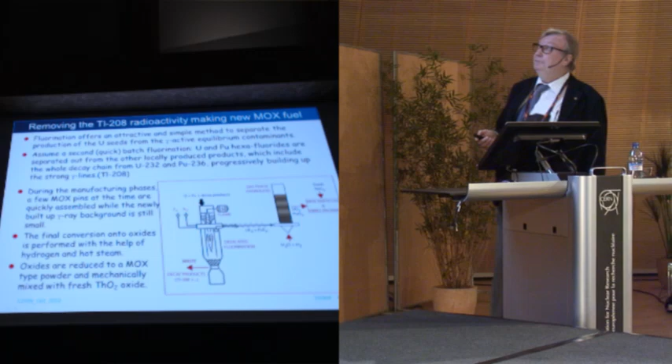Now, there's one more point here which I'd like very briefly to mention because you are pressing here. If you do a secondary process of fluorination just before creating new fuel, then you can find out from this diagram here that indeed all the decayed products which are radioactive can come to the waste, while after the fluorination, the uranium and plutonium are clean and therefore not radioactive at all.

So let me take some radioactive production with all the decayed products in there, and then go through a second local small size fluorination. That will give us this thing with no radioactivity, and all the radioactivity goes to the waste. So until such a radioactivity is built up again by secular construction, you have a clean situation which you can very quickly transform into uranium oxide, essentially with a process of separation, in a condition in which the radioactivity is very low. So you can vastly reduce the radioactivity of

the system. You see, it's a function of time here, the equilibrium contamination, which is very high at the end. At the beginning is when you go through a fluorination, because of the separation between the radioactivity and the uranium and thorium is very small, and therefore each cycle is expected to manufacture something like 15 pins, 9 kilograms each time, and this can be used to do the transformation under very simple conditions. The manufacturing is done quickly, but in this case the radioactivity is very small.

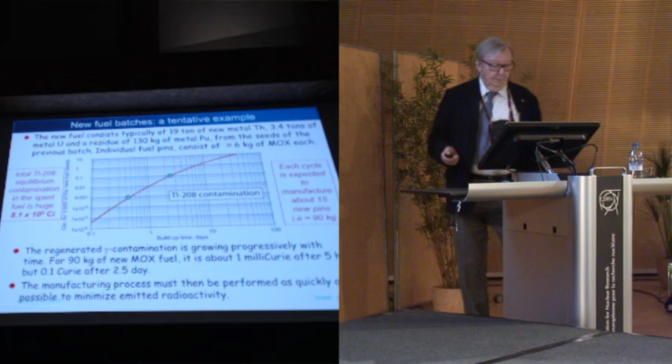For instance, 5 hours after the fluorination, you have only 1 millicurie of radioactivity in your fuel rod, and it goes to 0.1 curie after 2.5 days. This is an interesting conclusion. So let me now come to the conclusion.

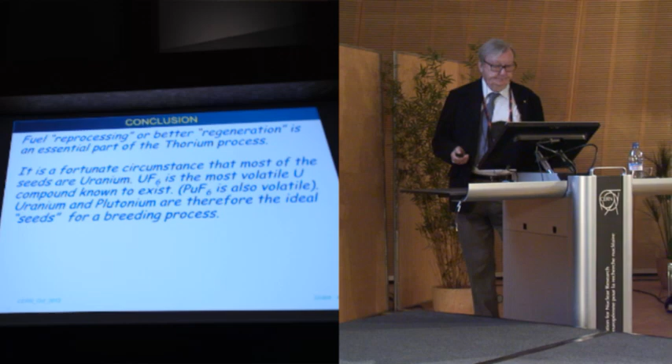Fuel reprocessing or better regeneration is an essential part of the thorium process. It's a fortunate circumstance that most seeds are uranium and uranium fluoride, and uranium hexafluoride is the most volatile compound known to exist. Also, plutonium hexafluoride is volatile. Therefore, uranium and plutonium are the ideal seeds for the breeding process.

And a simplified process can consist of keeping all the rest, spent thorium, fission fragments, minor actinides, as waste, and just leave only the uranium and plutonium seed and just make a simple fluorination to get these things out. Now, my own recommendations, then I conclude.

A 600 megawatt prototype subcritical reactor along the line is acceptable, but I would not use metal, I use a salt. So I will combine the process which you're doing with the fast reactor, but instead of putting lead, which is a metal, I use a salt. So I would suggest to replace in the design of CERN/AT/95-44 and Aker Solutions a salt.

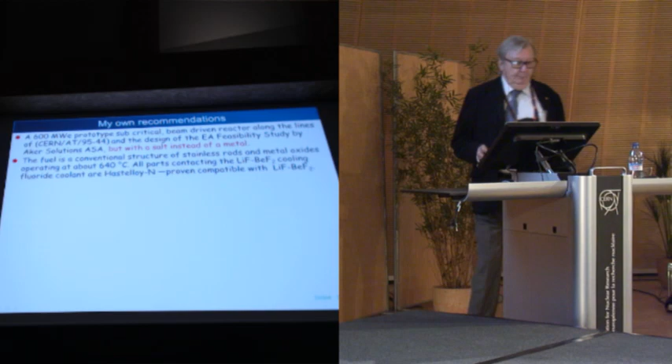Now, the fuel then becomes a conventional structure of stainless steel rods and metal oxide. I think mixing together simultaneously the fuel and the liquid is quite a risky solution. And so therefore the fuel is a conventional structure of stainless rods and metal oxides. It operates at high temperature, 640 degrees. All parts contacting the lithium beryllium fluoride coolant are Hastelloy-N and known to be compatible with this.

This thing is run for 10 years, as we showed in the graph. In situ fuel processing is performed based on transformation only of uranium and plutonium into hexafluoride, which is rather simple. Spent thorium, fission products, minor actinides, americium, curium are waste. Uranium and plutonium are seeds. Long-lived protactinium-231 is recovered with the help of bismuth.